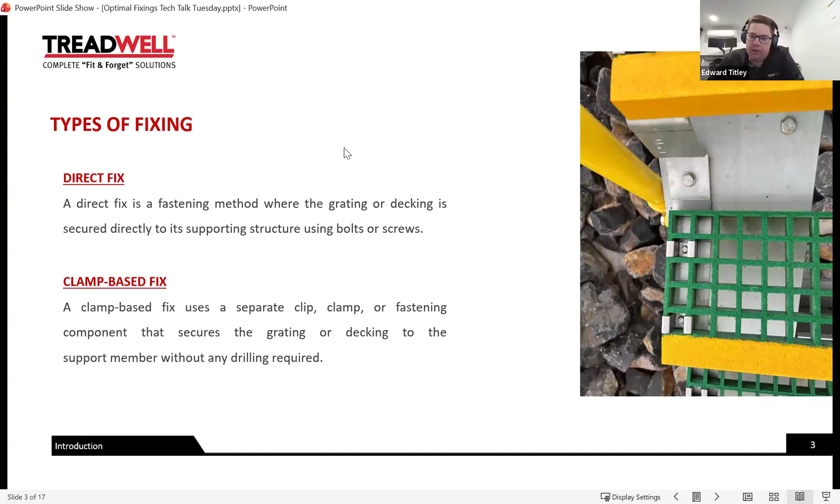Direct fix is pretty straightforward. We use a screw or a bolt. Now, a couple of things to think about. Typically, and this first point considers bolts, if you're using a screw, clearly you don't need access underneath. But if you're using a bolt and nut, you will need access underneath the structure to install, and also to remove if you want to take it off for any inspections, maintenance, or anything like that.

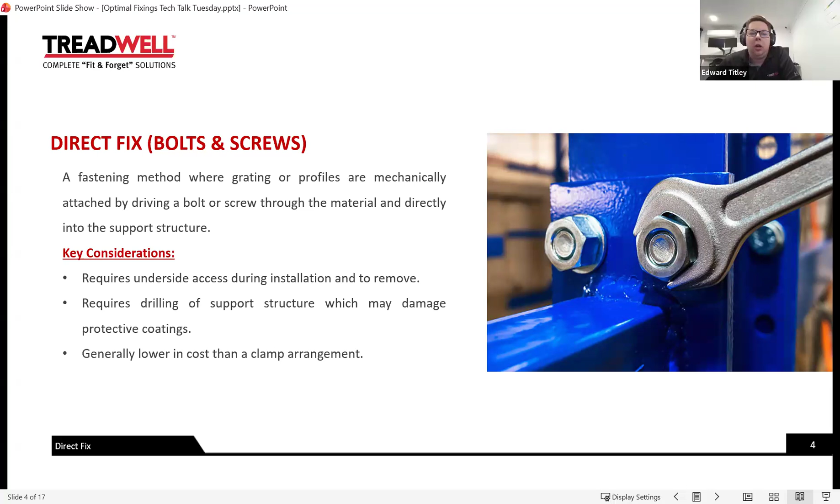You'll need drilling of the support structure in any case, whether that's a screw or drilling a hole to put a bolt through, which will damage your protective coatings, and it's generally lower cost than a clamp arrangement. There's less components, so it's going to be lower cost. Where this is typically used, if our support structure is timber, we'd screw to it generally. If it's FRP, we'd screw or bolt with a nylon lock nut, depending on the details of that structure, any vibration, that sort of thing.

We might screw through a light gauge steel structure with a self driller or self tapper. And if we're using an aluminium structure, we might also screw into it or bolt through it. And if we're using some sort of other plastic profile like poly, HDPE, a WPC, or wood plastic composite material, something like that, then we would obviously screw to that structure.

So, in short, where it's acceptable to put something through the structure, whether it be a screw or a bolt, this is a good method. And some materials like timber or FRP, there's no need to be using a clamp arrangement because drilling a hole in that material is not a problem.

I didn't mention it here, but where we're using especially a screw, I did mean to put it in, so apologies. We'll just discuss it verbally. When we're using a screw, sometimes there's issues with vibration and fixings loosening. There's a couple of ways to deal with that.

One is a very thin rubber sheet, maybe 2 or 3 mil, between the bottom of the grating and the top of the support structure. So it would sit between the bottom of the decking product and the top of the support structure. Or we use a nylon washer under the head of the screw. Both these methods appear to keep a little bit of tension on the fixing, and they do seem to reduce that issue of

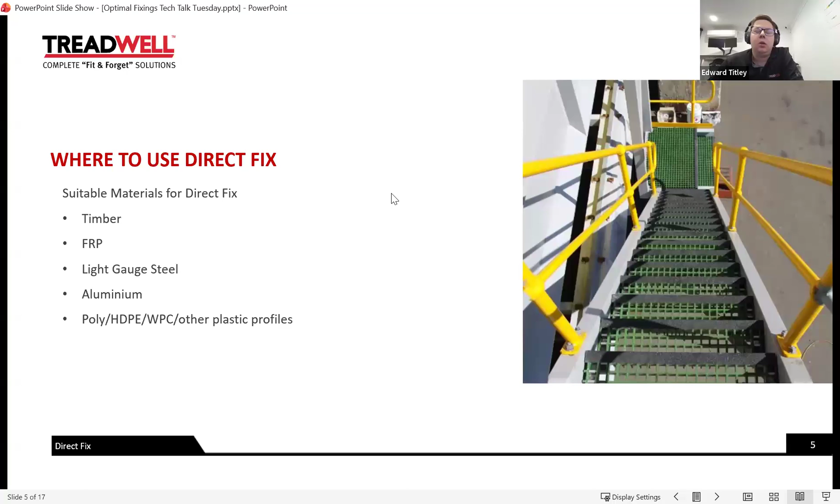So just keep that in mind if you expect something to need to be removed on a semi-regular basis. Now, clamp-based fix, we've mentioned that also. This is the other method we commonly see used. Now, how this works is, as we've probably seen, there's a clip on top and another piece underneath that will clamp to the leg of a channel or the flange of a UB or UC or something like that.

We'll look a little bit later on at what those fixings look like, but a couple of things to think about. The clip strength must be appropriate for the application, so not all clips suit a higher uplift force. That might be due to wave action or vibration if we're installing a grating product on, say, a ball mill or a SAG mill or some sort of vibrating or rotating plant or equipment where we expect to see some vibrations in that structure. Not all clips are suitable for that.

And we'll come back to the second to last point shortly, but the last one is not generally recommended for stair treads, and we'll have a look at why that's the case a bit later on in this presentation and what we can do to make that workable for stair treads.

Now, one thing we often see overlooked is the fact that if we want to do a clamp arrangement, and we often do, because if we've got an FRP structure, we don't mind. If we've got a steel structure that we've got hot dip galvanized, or we've got a coating on, we obviously don't want to drill any holes in that structure and damage the coating. That would defeat the purpose of the coating. So we want to clamp to it.

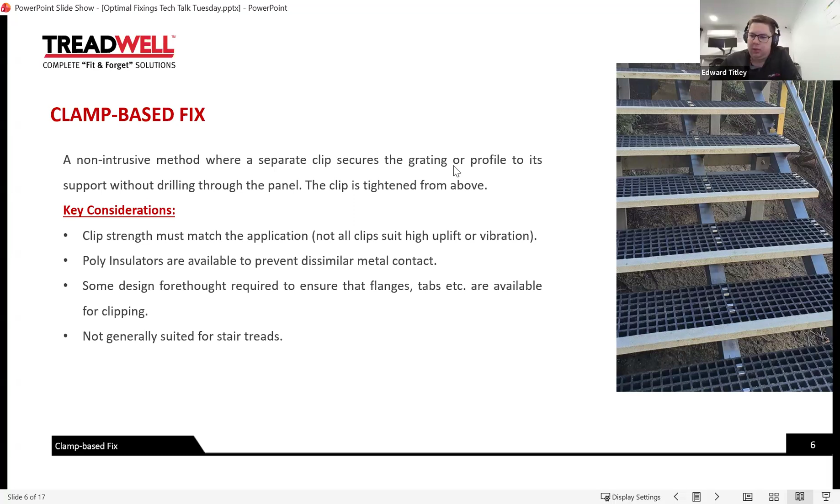Where to use clamp fixings? Obviously, if we've got a heavy gauge steel structure, we may not be able to drill through it, or use a self-drilling screw or something like that. But normally we want to, if we've got a galvanized or coated structure where damage to a coating is not acceptable. Most suited to open section structures, which we've just touched on. So by open sections, we mean PFC, UB, UC, equal angle, those sort of profiles.

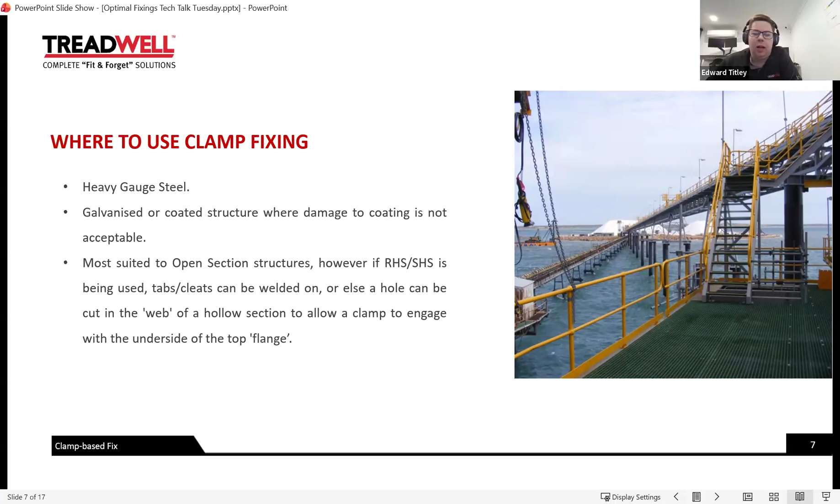However, if we want to use some closed sections, so RHS, SHS, we can weld on some little tabs or cleats, or we can cut a hole in the web, as I mentioned, to allow the clamp to engage with the underside of the top flange, if that makes sense.

So just a summary then, applications of direct fixing: FRP, timber and other non-metallic structures are common uses for these. If we're using a bolt and nut, access is required underneath for installation and removal. If we're using a screw, then obviously that's not the case. Clamp-based fixings, if we're using especially heavy gauge steel structures or structures with high grade coatings, good option.

Resolves dissimilar metals issues, and you might remember if you joined us before, we did a session on dissimilar metals back a few months. Feel free to look that up. It's on our YouTube channel or on our website. We'll just touch on that on the next slide very briefly.

But in a lot of cases, our clients like to use a stainless fixing. It lasts a lot longer, especially when we typically get a bit of build up on the top of the fixing. It looks a lot more aesthetically pleasing, but we can cause ourselves some issues if we've got, say, a mild steel structure that's hot dip gal underneath, and we don't want the stainless and the gal in contact. We'll create ourselves some challenges with dissimilar metals.

And lucky last, in some cases, access underneath is required for installation, however, not generally required for removal. So when we're installing something, we may need access underneath in some cases. In other cases, some fixings are able to be inserted entirely from the top. However, we are able to loosen that fixing from the top, and so we should be able to remove it without having to get access underneath, whether that's scaffolding, EWP, boats for structures over water, something like that. So a bit of an easier option there.

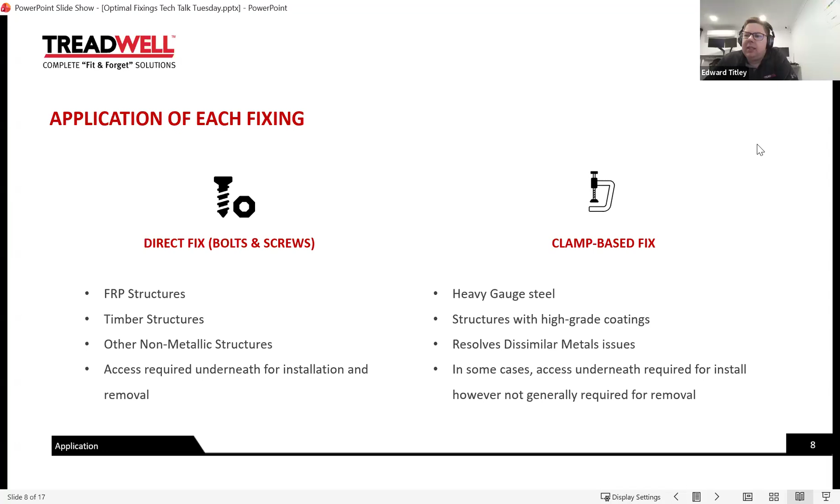Now, dissimilar metals. As I said, we mentioned this in a session previously, but we'll just touch on it in relation to grating fixings today. Often we can see dissimilar metals concerns that are brought about by grating fixings. For aesthetic reasons, obviously, stainless is often desirable, and for durability reasons as well. However, that's not going to play nicely with this mild steel structure.

So we've designed a clamping arrangement, for both our J clip and H clip, and we'll look at what those look like shortly, with a custom injection molded poly or nylon insulator that fits around the clamp. And here's a rendering of one of those. And that means that there's no contact between the stainless surface of the underside clamp and the actual structure itself. So that's isolated by this nylon or poly insulating pad, for want of a better term, and that deals with our fixing concerns.

So we've got stainless fixings, no worries, nice and durable and aesthetically pleasing. We've got our mild steel structure, or our structure with a coating on it, or whatever we're using, and then we've got the contact between those items isolated with the use of this pad or isolating piece that sits in between the clamp and the structure. So no damage or scratches to our coatings, and no contact with the galvanized structure, or no contact between stainless and mild steel from a galvanic corrosion perspective.

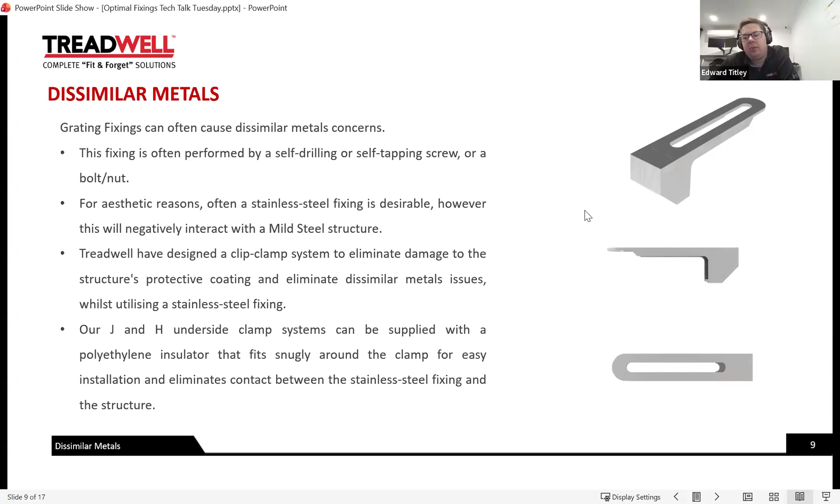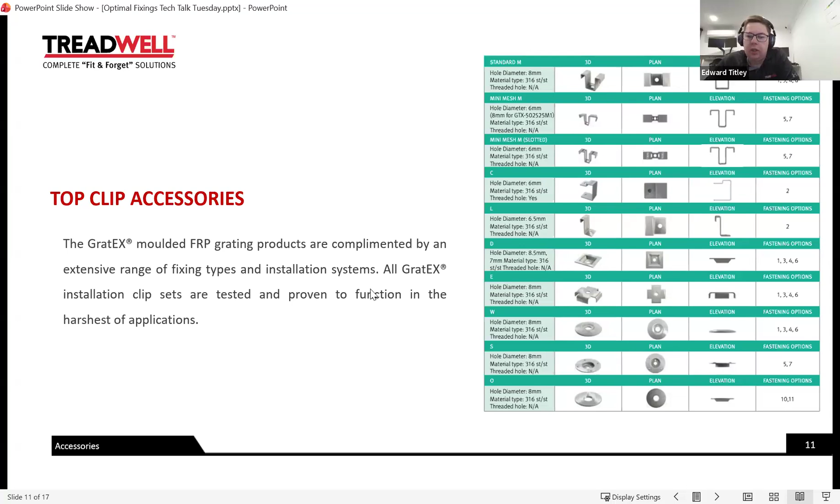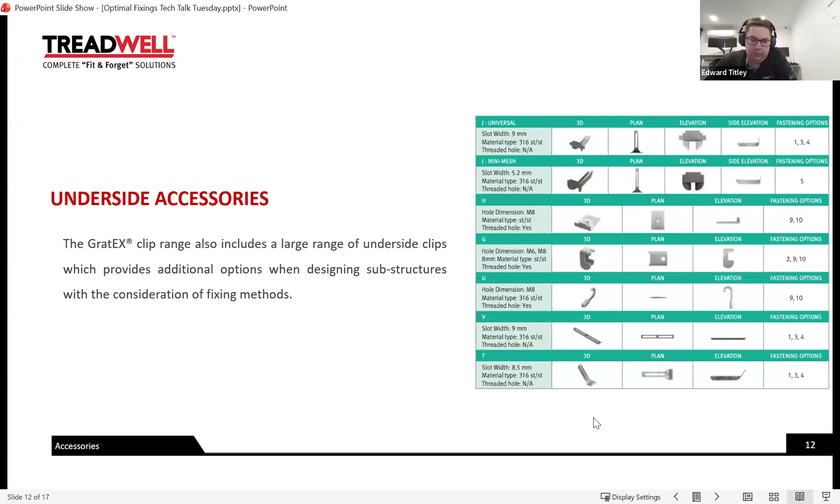And I've also seen a similar arrangement done on a balustrade where we've used an FRP mesh for balustrade. If we add some small little flat bar tabs or a piece of angle or something like that on top of our ledger angle, or we contain the tread on the inside, so inside a channel with the legs of the channel, then we're providing some longitudinal restraint.